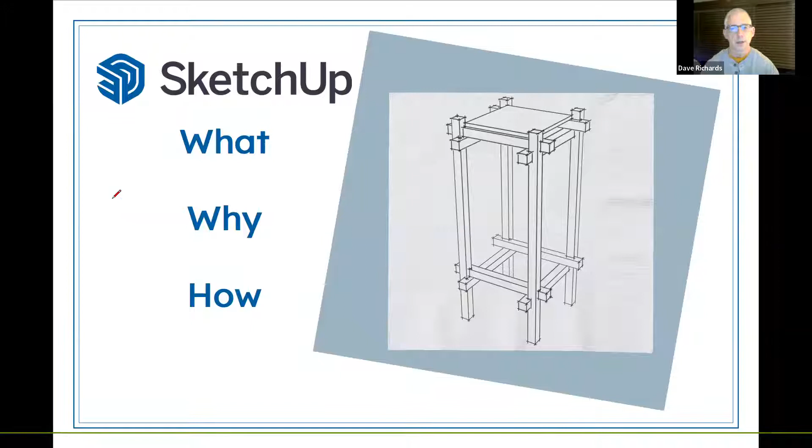SketchUp, I really want to quickly just cover a few little things about it. SketchUp was originally the idea of an architect who wanted a digital version of sketching on a napkin. He didn't want to get deep into something like AutoCAD. What it's turned out to be, though, is really a neat tool for anyone who wants to do visualization of projects, because you can create a three-dimensional project that anybody can look at and understand what it is you're thinking about.

There are a number of versions of SketchUp. The current Pro version is 2022. I'm not going to read all of this stuff.

Free versions for hobby use are SketchUp 2017 Make, which, although it's getting a little long in the tooth, is still functional. There's SketchUp Free, a web-based version that's free for hobby use, and SketchUp Shop, which along with SketchUp Pro, are intended for commercial use, although hobbyists can certainly use those. The paid versions, Pro and Shop, are subscription model things like pretty much every software on the market today.

I've been using SketchUp for a long time, since 2003, hard to say that now. I've been an authorized trainer for SketchUp since 2006, and I've been working as a contract employee for Fine Woodworking Magazine since 2007, doing blog posts about using SketchUp, and I create plans for projects I feature in the magazine.

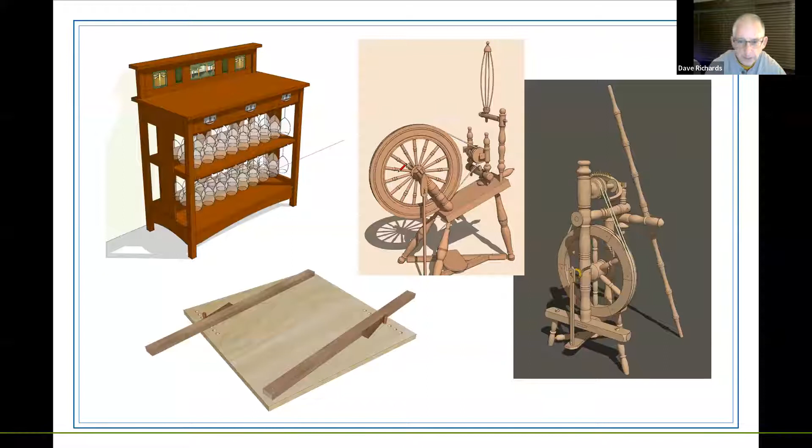We'll come back to that in a minute, and let's do this.

Dave, just as a question, what version of SketchUp would you recommend for a hobbyist that is just new at it? It depends. I would suggest, for a hobbyist, you might start with SketchUp 2017 Make. That's free for hobby use.

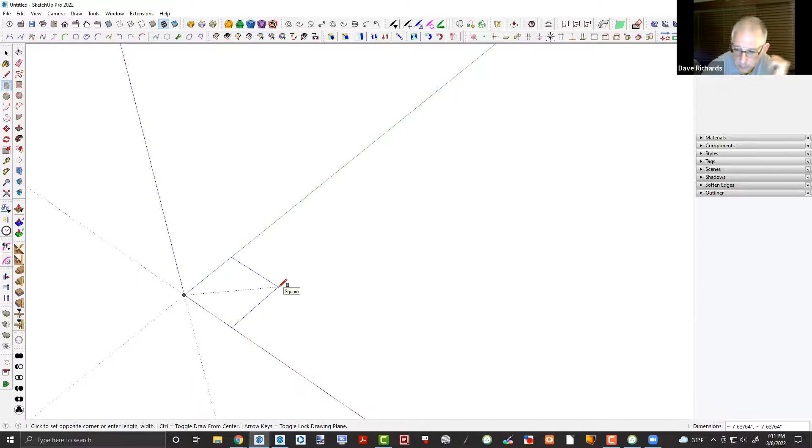So I'm going to start. I've got the rectangle tool and I'm just going to drag this out. And by the way, down in the lower right corner, hopefully you can see this on my screen, kind of above the time and the temperature, there's some dimensions shown. And if I drag this out, you can see the size of the rectangle that I'm getting. And if I just type, in this case, I'm going to type 0.75 and 16. So that's 3/4 of an inch by 16 inches.

And then I'm going to use the push-pull tool. By the way, I may fall into the thing of using keyboard shortcuts. They're really useful. I think of the space I'm working in as sort of my workshop. The toolbars are the tools that are sort of close to hand, or they're wherever in the tool tray on my bench. The keyboard shortcuts, I think of those as sort of the tools that I keep in the pockets of my apron. So they're really handy.

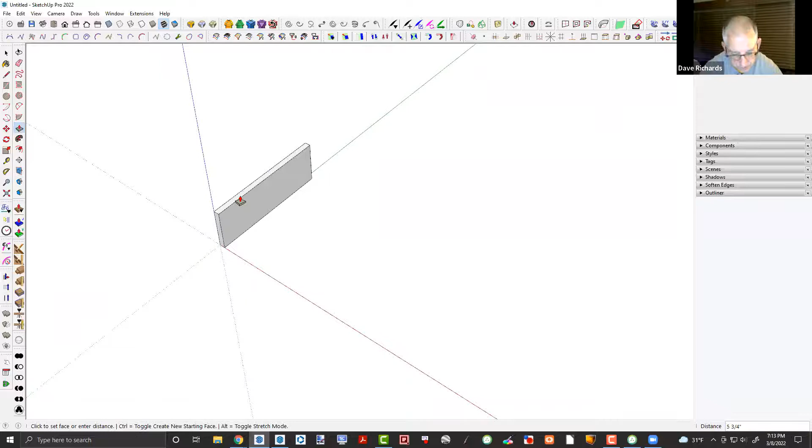And by the way, I'll do this a different way. I'm going to type 5 3/4. You can do that. That's how high I want to make that part. So now I've got a 3-dimensional thing. This is going to be the end of a case.

And if I drag a selection box around that, I'm going to hit the G key and I'm going to create a component that I can give a name to. So I'll just call this case side. And so now I've got a part.

And if I want to, let's say I'm going to need another end to this thing, I'm going to use the move tool and the copy function. And for those of you that are new to SketchUp, don't let the speed I'm working at here deter you, because I want to get through modeling this thing so I can answer some questions. So I'm maybe not going as slow as I might if I was really trying to just show the modeling of this particular piece. This is just a thing to get the point across.

So in this case, I'm going to move this side down 23 1/4, so 23.25. And let's make another copy of that. If I measure that, you can see it's 24 inches now. So I've got a 24-inch wide case.

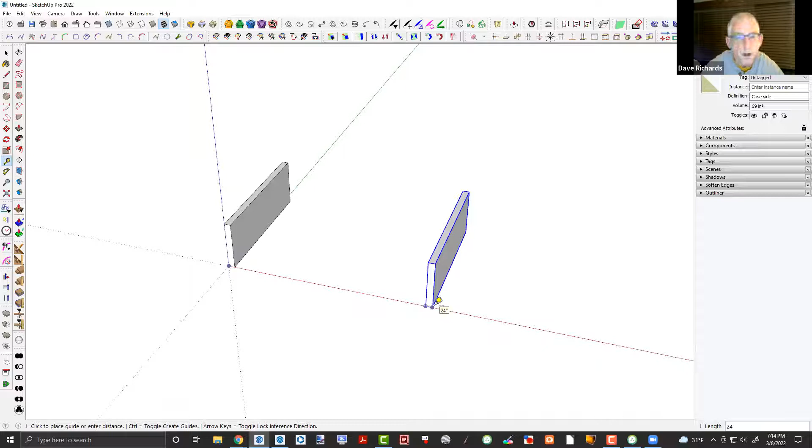And so if I get the rectangle tool again, let's say I draw a rectangle from this point. So what I'm doing, and this is one thing that I've found is really useful, is I'm modeling in place. So once I've got my end pieces, I have the footprint of my case, so I don't need to know what the dimensions are for that. If I make that 3/4 of an inch, I can type either 0.75 or 3/4.

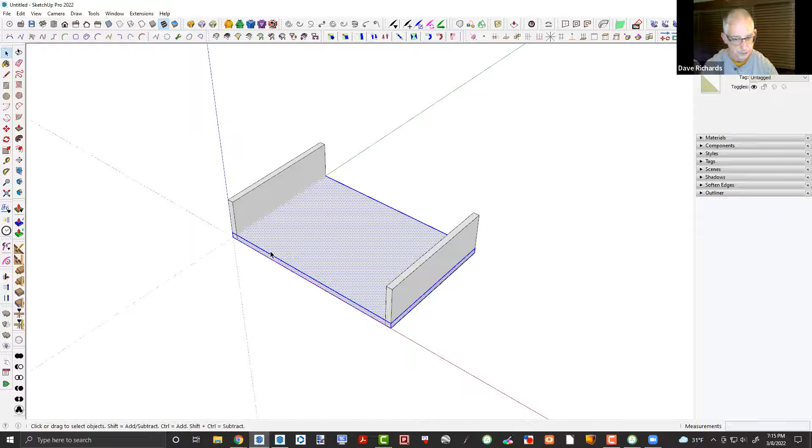And the units are understood. And this time I triple clicked on that geometry, which selected all of it. And this time I hit G again to create a component, and called it top/bottom.

And if I now select the move tool, M is the keyboard shortcut. That's the default. If I put that up there, I now have a case with all my parts. To keep things simple here, I'm going to do a thing real quick - I'll just flip that, which makes it a mirror image of the one on the left.

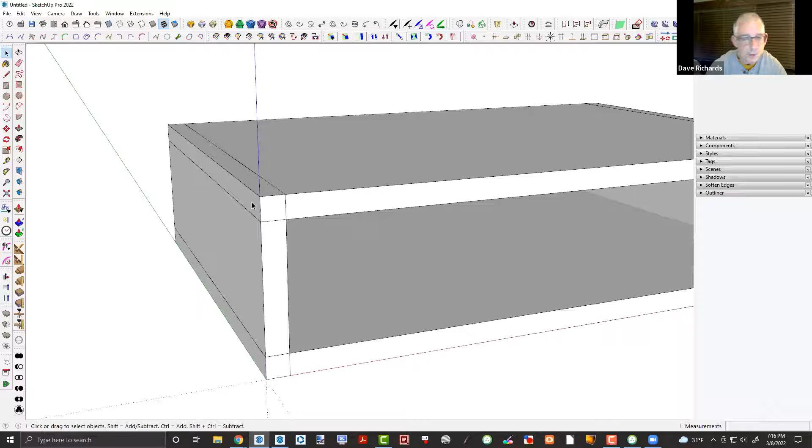But I'll do this a couple different ways. I can open one of these for editing and make changes. But before I do that, let me talk about this - see how I've got my parts overlapping? That's a cool thing in SketchUp because you can lay out parts that are full size. You couldn't do that in the shop very easily, maybe with a really big hammer.

But I can draw a diagonal across between those corners. And then there's the tool called push-pull. I can push that back, and I've just mitered the end of that piece.

Another way to do that would be to use the move tool. So if I select that edge and come down to that corner there, and repeat the process. The neat thing here is, so if you could work in your shop with...

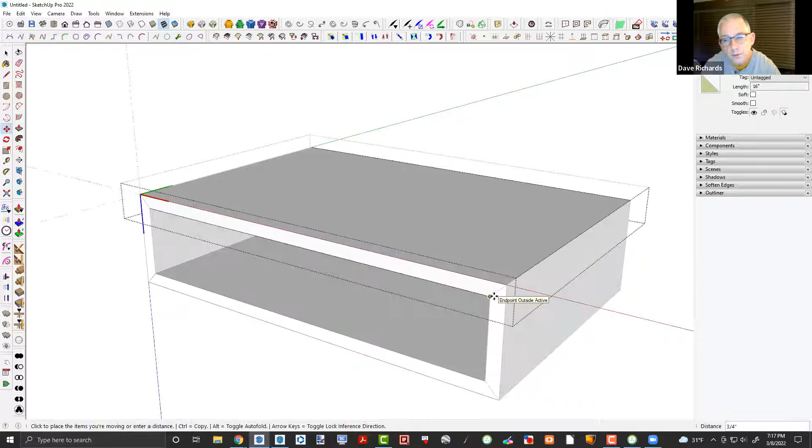and just take all your measurements off of what you've already measured, of what you've already built, you'd have a whole lot easier time and you wouldn't have to work with any numbers. You see, I've just now mitered all 4 corners of my box without knowing anything about dimensions or without entering any dimensions.

If I want to put, let's say I'm going to put a drawer front that's an overlay on here - I'm kind of working on a mid-century modern piece, but I've just drawn a rectangle. I don't even care what the size is for this thing. It just has to fit. So once I've started my model, everything just has to fit. That's kind of the key here.

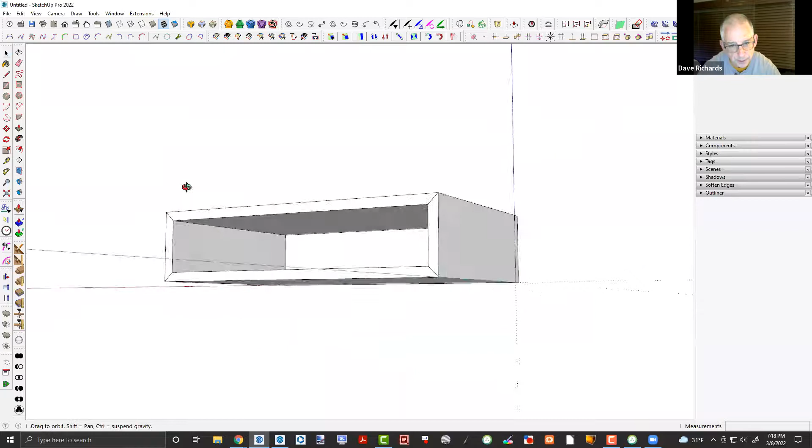So if I make that a component - again, select it all, G, we'll call it a drawer front - and I've got a drawer. I'm not going to go through the whole process of modeling the drawer here because it's more of the same sort of thing. But let me show you something else that's kind of neat.

If I've got a component that I've created - actually I've got a bunch of components that I've created. Components are something you can save in SketchUp to use later. What I'm going to do is use the move tool and move this up.

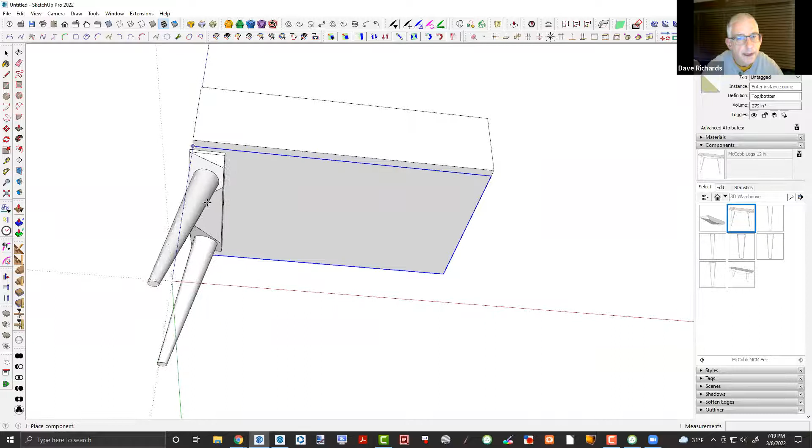Let's go straight up - I keep hitting my mouse. 12 3/8. Because I can take this and let's put it there for the moment. It's going to the wrong place. There we go. I move that in now, let's say 3 inches.

I've got a leg - I've already done this leg component, leg and cleat thing. In this case, I'm going to rotate that around 180 degrees. And we'll move that in about 2 inches, we'll call that good. That's a little bit farther than it needs to be, but...

one of the things that's really cool about this is that you can have components that you've already created and you can save them to use for later projects. So you don't have to model things multiple times.

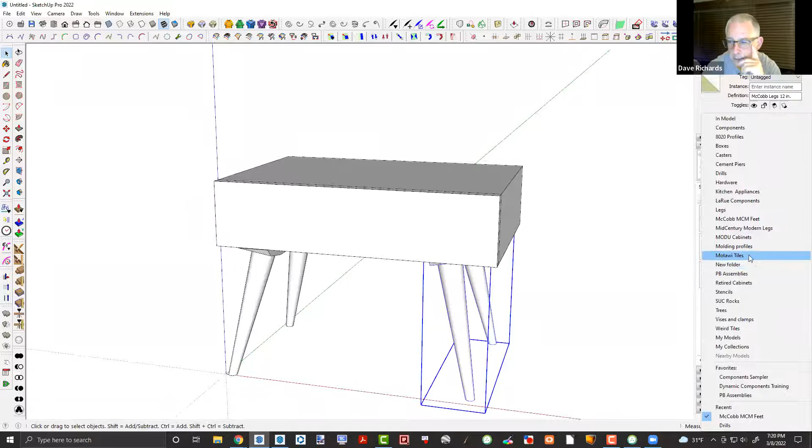If I go in here to say my knobs and pulls - this is probably not really appropriate for this particular piece of furniture, but - put a drawer pull on it. That's something I modeled probably 10 years ago, and I still have that component. I can use it for projects now.

And so, Dave, does the free version allow you to save components? Yes, you can create components and then save them out to what's called a local collection, and use them later. I would highly recommend that.

You know, for me, like when I go out to buy screws, if I need 10 screws for a project, invariably you end up having to buy something stupid like 13 of them, right? It's never the right number of screws when you buy a package. But when I do that, I'll buy a box of 50 or 100, and throw them into my collection of hardware in my shop. So I've got lots of different hardware I can choose from, which means now my wife will let me go to Menards, or Rockler, and buy hardware.

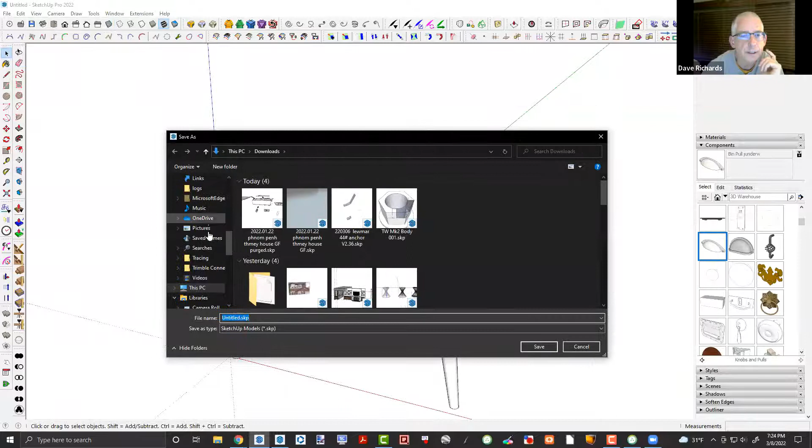So let me do this. I'm going to save this file. I'll save as, and it doesn't need to go there. We'll put it on the desktop. I'm just going to call it mid-century thing, I don't know what it is.

I have to save it before I can do the next step. One of the nice things about SketchUp is that with the desktop versions, there are a whole lot of extensions available, and here's a whole long list.

I don't want to go into all of these tonight, but scroll way down to the bottom. Why it shows up down there, I don't know, but there it is. There are a number of cut list extensions, and I'm going to add something to get my drawer pull to show up in the parts section.

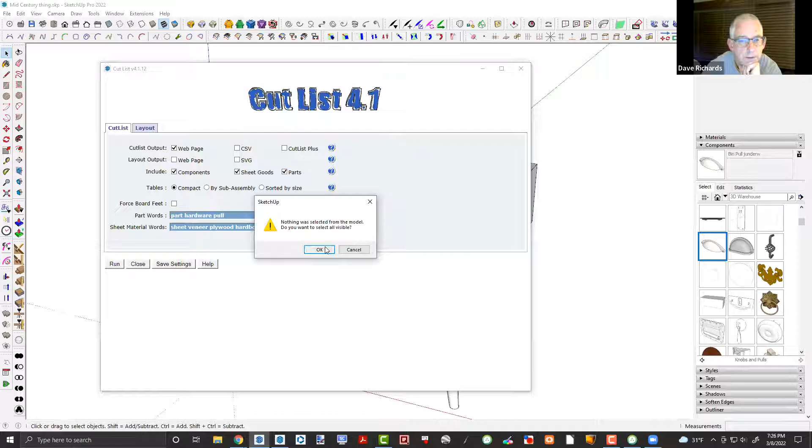And I'm going to click run. Nothing was selected—do I want to select it all? Use it all? Yes. And so here's just that quick. I've got a cut list that gives me the dimensions of all the parts.

And if I scroll down here all the way, you can see my pull shows up in the other parts section. So I don't know how many board feet of drawer pulls I need, but who buys drawer pulls by the board foot anyway. So all of my parts are listed with the quantities and the dimensions.

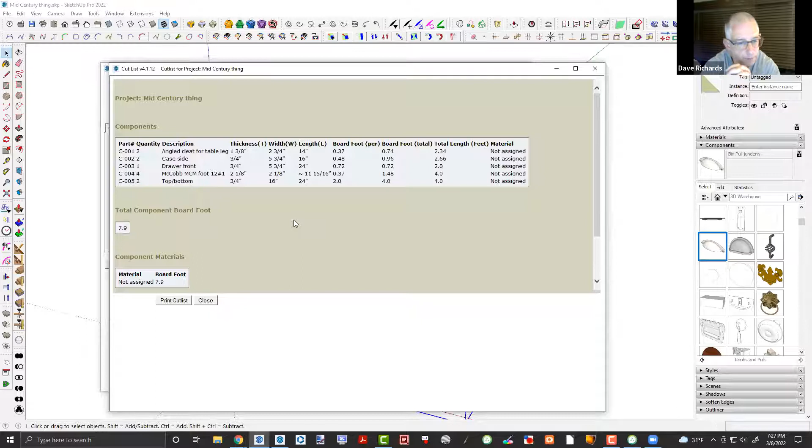The foot or the leg is kind of an odd length because of the diagonal, but this can be a really handy thing when you need to go out and shop for lumber. And it happened that quickly—it'll happen that quickly on a much more complex model.

Anyway, this is a free extension, available from the extension warehouse. You can download it and install it into even SketchUp 2017 make. It'll give you way more information than you actually probably need, but if we had something that was supposed to be sheet materials, it would sort that into a sheet materials section.

Very quick. One of the things that I like about working in SketchUp, the way I've done it—where I laid out a couple of parts and then modeled everything else to fit—is that I don't need to know the information to get it into SketchUp. I want SketchUp to tell me. If I had to know every single dimension to model this thing, I might as well just do it on paper and write out my cut list manually.

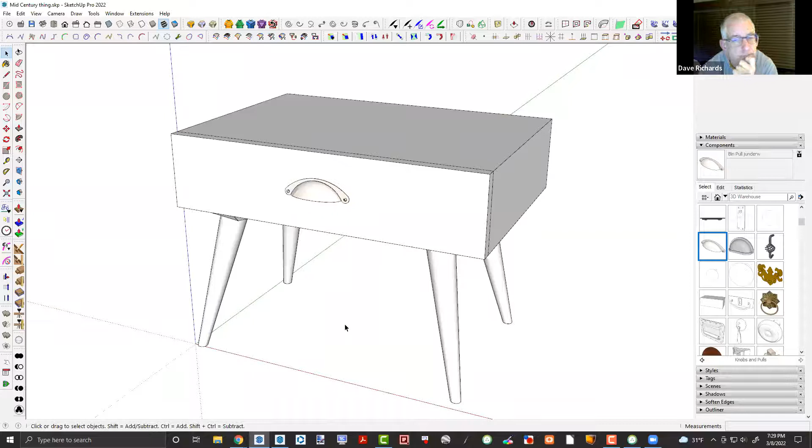Does anybody have any questions at the moment? Want to ask me anything? Would they like to see me do something in particular? Any of that kind of thing?

We have one question about a member making a shadow box that has a fabric ribbon in it. Is there a way that a fabric ribbon or a piece of fabric can be drawn in SketchUp?

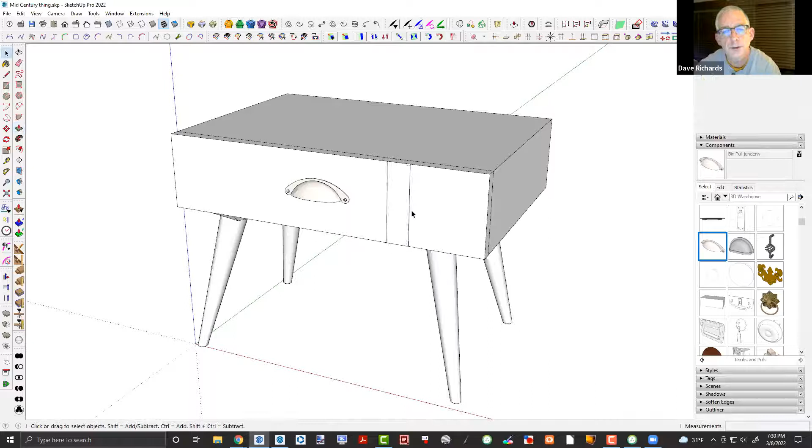Yeah, you can do something like, if it's just a straight thing, maybe that sort of a thing. If I make that really thin, but very slightly three-dimensional, I can add a material to that. You can add custom materials. I don't have a ribbon material right now, but if I go to my textiles options, I could add some sort of texture. That's kind of the wrong size, but I could make that something like 2. So I'm going to add a texture, if that sort of thing answers the question.

There's an extension, gets a little involved getting into it, called Clothworks. It's not available for free, but it'll actually drape fabric over something, if that's what he's after.

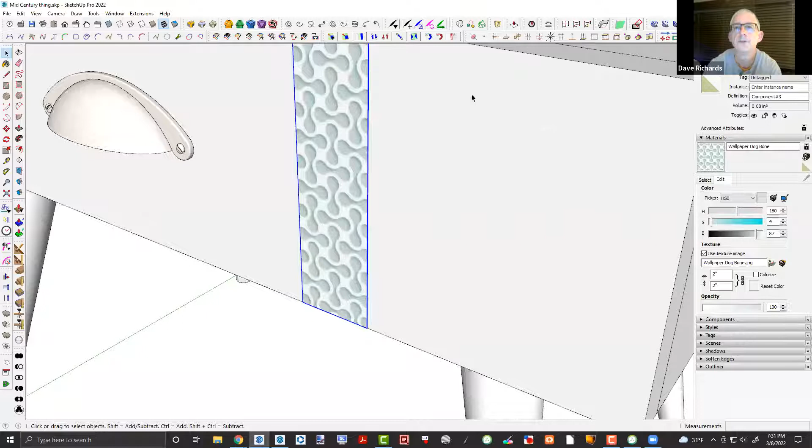Or there are other extensions that can help. If I make that a component—I didn't give it a name, I kind of cheated there—I'm using an extension called Fredo Scale that will create a curved piece, if that's what they're after. So there are tools out there that can do that kind of thing.

I don't know exactly how the ribbon would be used.

Is there a way you could convert a SketchUp file into something a CNC machine would read? Yes, you can export DXF files, for example, that can be used for CNC stuff, but you need either SketchUp Pro or SketchUp Shop to export vector files—DXF is a vector type. SketchUp Make or SketchUp Free, the web version, don't offer that. There's also an extension called Faber that's set up specifically for getting CNC stuff out of SketchUp. Also, Vectric makes several different software options that will import a SketchUp file and generate files for CNC routing.

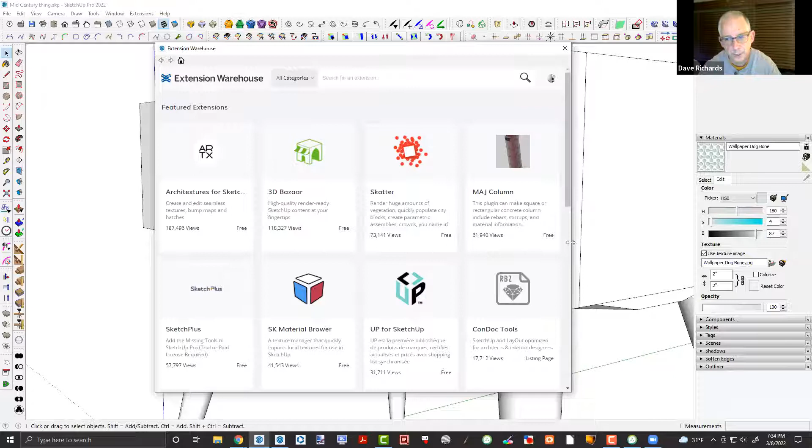Do these extensions, are they available like in a warehouse, or where? Yes. There's what's called the Extension Warehouse, which in 2021 they moved into the Extensions menu. Prior to that, it was in the Window menu. You can go to the Extension Warehouse and search for various extensions. Many of them are available for free. There are some that are commercially available.

Another option is a website called Sketchucation. It's a web forum that's actually older than the Extension Warehouse, and they have more extensions. There's not a whole lot of crossover between the two—a little, but not much. So Sketchucation is another source, another common source.

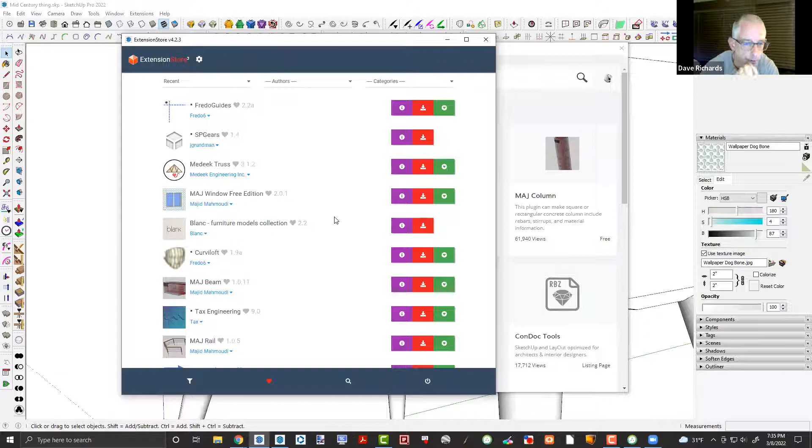What I've got open here is the Sketchucation extension store, which allows you to install extensions just by clicking the red button. If you look at the Extension Warehouse and select one—I don't know, let's take that one, I don't even know what that one is—there's an install button and you can install that. I don't read French, so I don't even know what that one's for.

Once you've installed extensions through either the Extension Warehouse or the Extension Store, when there are updates, you can find out about those and update them. Lots and lots of extensions available here. This is just some recent ones, but you can search if there's something you're interested in doing.

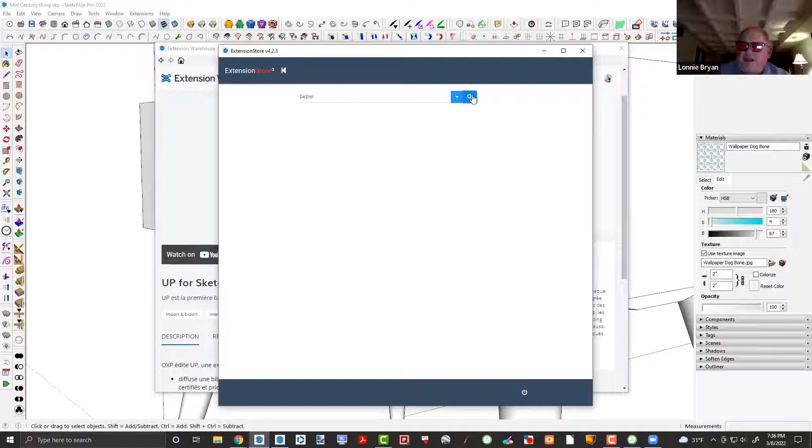I've got a question here that I apologize, I don't understand. The question is, are all the drawings isometric? No.

So I'm working with the camera set, SketchUp's camera set to perspective. You can choose to use parallel projection and then an isometric view. Personally, I find that really jarring to look at. Most people don't get it when things look this way, because this isn't the way we see things in the real world.

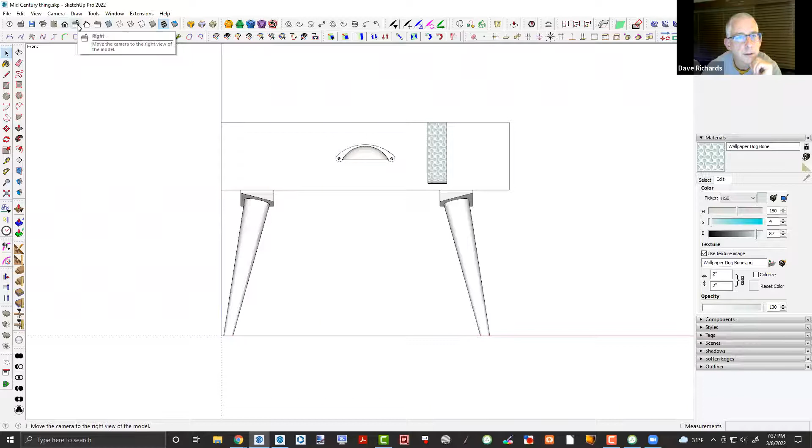But you can also choose two-dimensional views if you want. So this is just a straight-on front view if you want a 2D view, or if I want to look at this from the side. And you can see I didn't get one of my legs positioned correctly, so let's fix that. We'll go back here. So you can choose to show your three-dimensional model in 2D if that's what you want.

Let's do this. Let's open a different file that's got a little more going on. In fact, what I'm going to do is go to one that I did for Fine Woodworking. Let's see. We'll use, let's see what that one does. I'm not going to save the changes to that. Yep, there we go. All right.

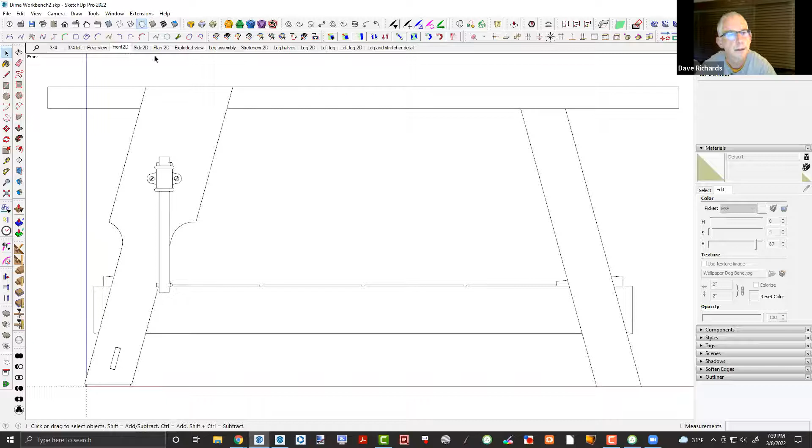So this is a bench that I did for Fine Woodworking for their tools and shops issue, and I created plans for it. So here's a perspective view, but I've also got a 2D, and I've created what are called scenes. So they're sort of fixed camera positions. I've got a front view, a side view, and a plan view, looking straight down on the top.

By the way, here's a component that I made years ago for a different project, and conveniently I saved that as a component and could use it here, so I didn't have to remodel all those screw threads and that whole vice screw to make that work.

So is it possible for you to like explode this view and lay it out on the board? You can do that. You can pull the parts away from each other and lay them out, like you might want to cut them out of view. What I do when I create an exploded view is I've got a copy of the model.

My assembled copy that we were just looking at is over here by the origin, where the red, green, and blue axes come together. But I've got this other copy here, and of course I don't have the top displayed here. So I've created another scene with a separate copy to create an exploded view to use in the plans.

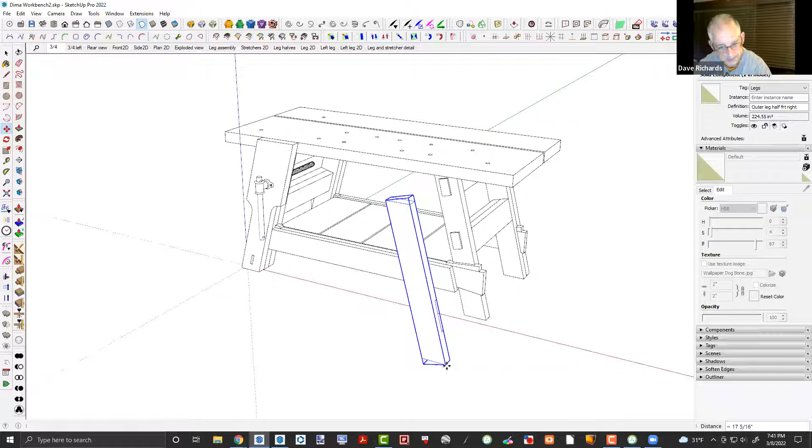You can do this, and this I just did by selecting components and moving them away from each other. One of the nice things when you create the components is they aren't attached to each other. So if I want to pull that leg out away from the rest of the model, I can do that because it's not stuck to it. So it's pretty easy to pull those things apart.

If you wanted to do a layout sort of thing, let's go back to here. I'm not going to do all of this, but let's just do some of it in that cut list extension. Scroll back down to the bottom of this list. Here we go. It does have an option to do a layout sort of thing. This may not be exactly the way we would really want to run it, but it'll show the parts laid out on boards.

Now, my personal feeling is that for stuff made out of solid wood, this is not a particularly useful thing, because you need to cut out for grain and around flaws in the wood and that sort of thing. But for sheet materials, it's really pretty nice. So you don't really have to do the layout manually, but you could if you wanted to.

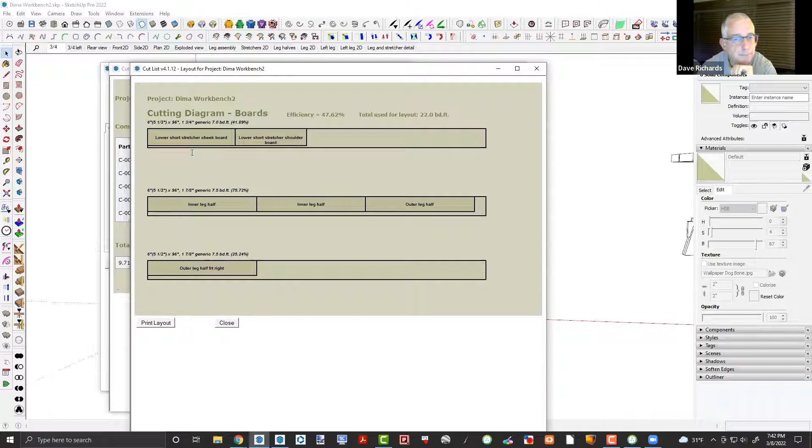Dave, it does give you a good idea about how many boards you ought to be looking for. Right, right, there is that. Of course, this is sorting them sort of by thickness. So these first two pieces are out of a 1 3/4 inch thick board, and the next one is out of 1 7/8, so they're kind of thick pieces. But yeah, you're right, you get an idea of how many boards you might need.

So, of course, you might lop this thing off and then plane this unused section down, or you might start with the 1 7/8, lop this section off and plane the rest of it to 1 3/4 and get some more parts out of it—that kind of thing.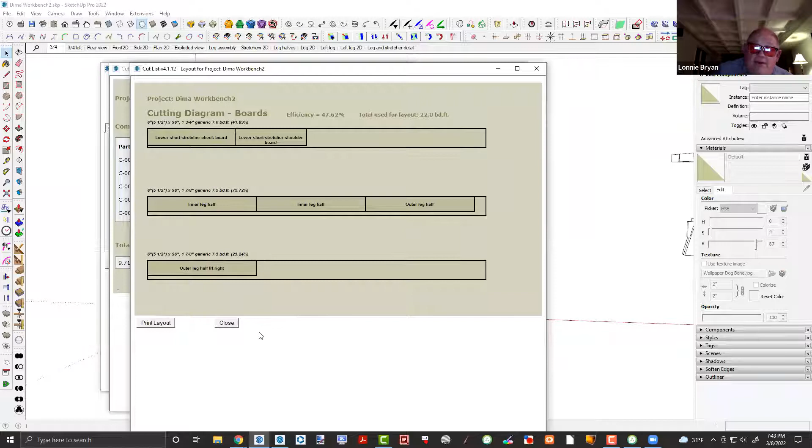Once you make a component, can you call it back up and modify it? Yes, you can open the component for editing. You can either right click on it and choose edit component, or—what I normally do—just double click on it and open it for editing.

One of the neat things about this—let me just do it to this thing here. Let's say we want to put a hole in this. So I've got the circle tool and I'm just going to drag out a circle of some radius. So I've just put a hole in that thing.

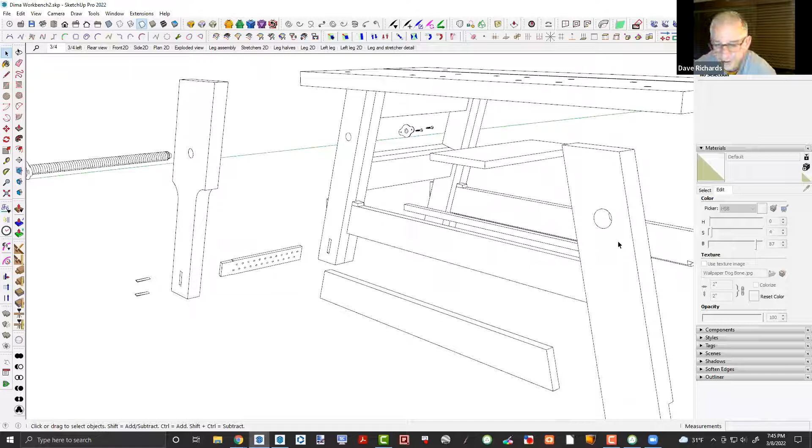If we go over here to the copy, whatever I did to the one component gets done to any other instance of the component in the model, which can make you kind of soft—because in the shop, if you've got 4 or 5 parts, like drawer sides, and you cut the dovetails in one of them, in SketchUp the other copies get the same dovetail joint. But in the shop you still have to handle all four of them. So you don't have to do that same thing over and over with the component.

The other thing is for something like this—do I want to do this here? Yep, no I don't. I'm going to undo that because I don't want to get into my mortise. There's a mortise on the other side of this thing, but undo is our friend here.

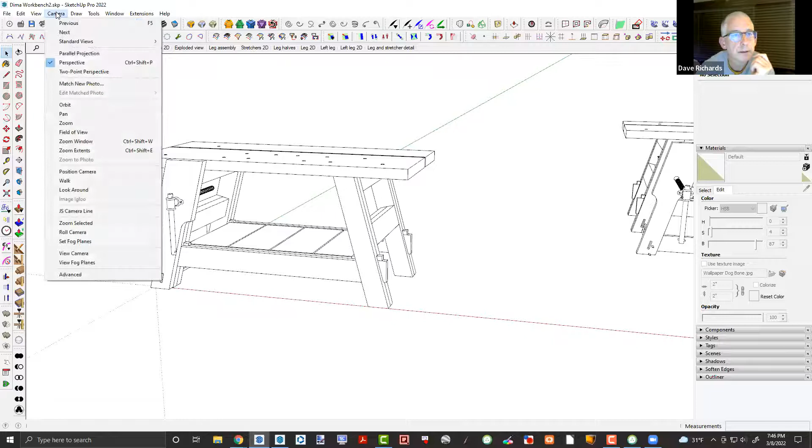But yes, you can make modifications to a component once you've created it. That's also really nice in that if your project changes—let's look at that thing here.

So maybe the client says they want the bench to be another foot longer. We can modify it very quickly. Oops, I came off the axis there—so you can modify it the wrong way, of course.

But you can also—I won't do the entire model this way—but you can see my components over here are getting longer. Maybe I'll make another shelf board. I just made a copy with the move tool.

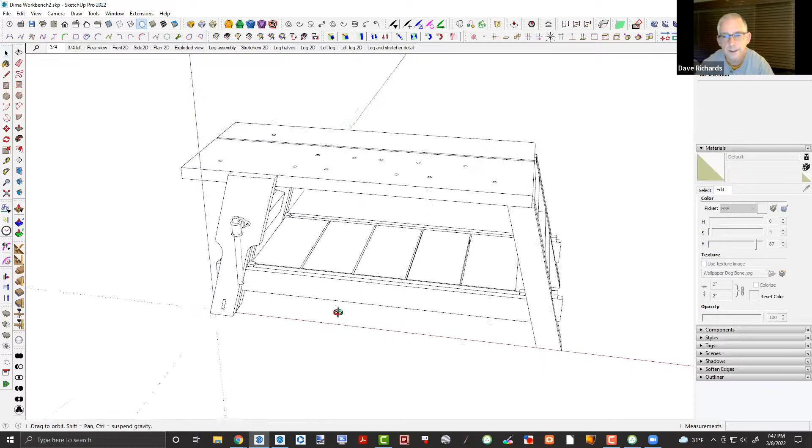Actually, maybe I'll end up doing this after all. That one, I'm just going to use push-pull. So now I've just made the bench another foot longer than it had been.

So it's really nice, especially if you've got to get somebody else's approval and they say, can you make it bigger, can you make it smaller—whatever. It's kind of nice to do that before you're committed to making sawdust.

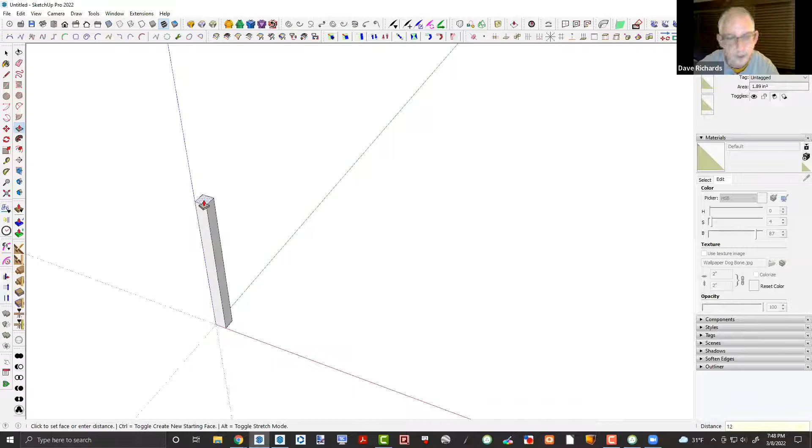One of our members has asked if you can show us how to make a mortise and tenon in SketchUp. Sure, let's do this. I'm going to start with a new thing—let's do, I don't know, 1.375. We'll make a small leg, and I'm going to make it kind of short here—just 12 inches tall.

So I'm going to make that a leg. I'm going to show you two different ways to do this. Then let's put an apron on there, and we'll make that 4 by 3/4. I'll just pull it out a little ways and not do the other end of it.

To make it so you can see what I'm doing, I'm going to go ahead and make that a component—we'll call it apron. And then I'm going to switch to X-ray mode so we can see through the leg. I'm going to create a tenon, basically a third of the thickness—1/4 inch, that'd be common.

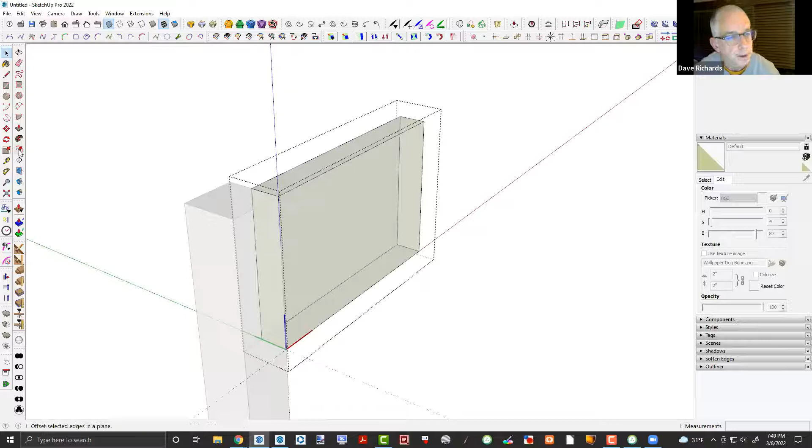So I'm going to use the offset tool. I'm going to come in here—let's come in 1/4 inch. And I'm going to pull that out, let's say 1 inch. So I've got a 1 inch long tenon.

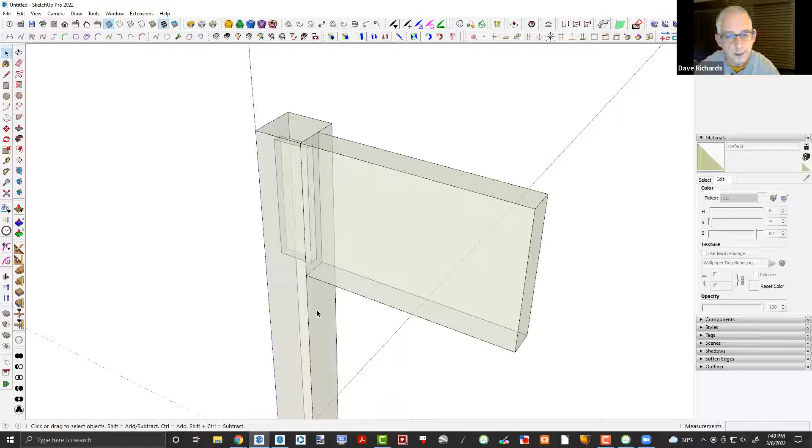So that's done. Now the neat thing here is I've put the tenon in the leg and there's no mortise yet. So I could lay out the mortise just like I would in the shop with lines and then draw it. But what I can do here is open the leg for editing.

I've got the rectangle tool, and what I'm doing is tracing the base of the tenon. It's maybe a little there, you can kind of see that. And now if I use push pull on that face, P again for the push pull tool.

Now, of course, that's not allowing for any extra depth—usually you cut the mortise a little deeper than the length of the tenon, but that's a perfect fit and perfectly laid out for where the apron is, because I use the tenon as the guide for doing that.

So if I switch out of X-ray, I'm just going to move a copy of this out, and you can see there's my mortise. I'm going to undo that, pull a copy out. I just did a bunch of Control Z's, need to do another one. All right, so now I shouldn't have a mortise.

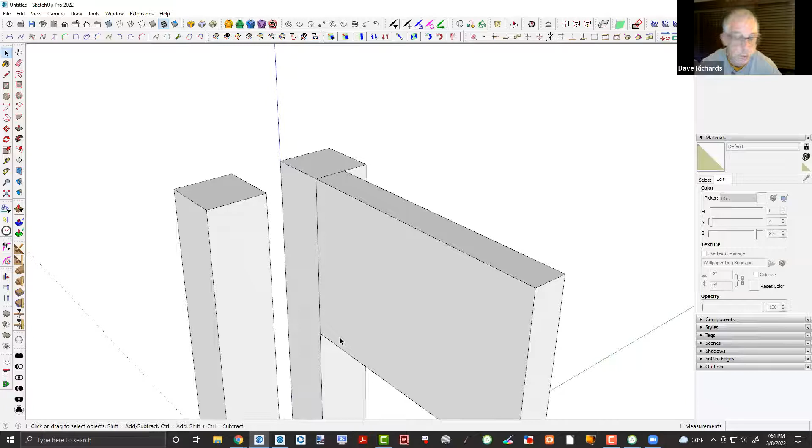I'm going to use a keyboard shortcut for this, but there are a couple different tools available. One is called Bool Tools 2, which works in SketchUp Make, and it'll use one component to trim another. I've got a keyboard shortcut for that, and I'll use this to trim that. And I've got a mortise.

Bool Tools 2 is not a free extension, but for the time it can save you, I think it's pretty well worth it. So if I pull this back, you can see I've got the mortise in the original leg as well. Anymore, I don't draw mortises—I draw tenons and make the tenons cut the mortises.

Can you dimension this or show us how to dimension a drawing? Yeah. So in the tools, dimensions. And we can put in—let's go here, and we'll come here and come up there—and we can put in whatever dimensions we think we need.

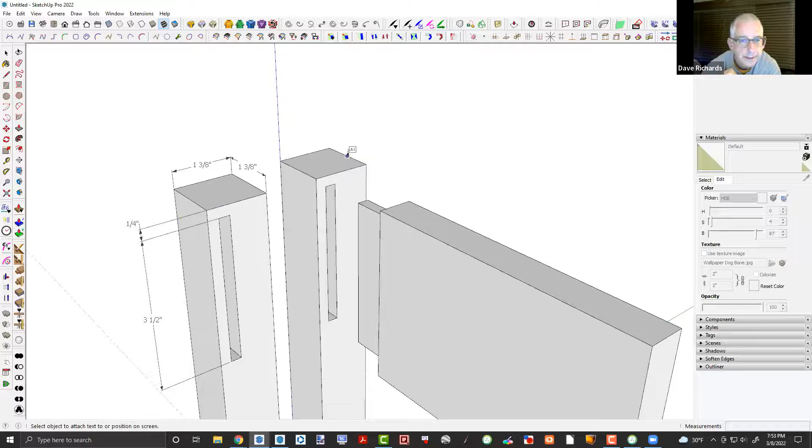That one, I don't like where that is, so I'm going to do text position, outside end—I just right clicked on that to get that. And we can come down here and do all that kind of dimensioning we want. You can add labels too—if I go to text, I don't even have to type anything because it's taking the component's name. So I can do that sort of thing if I want.

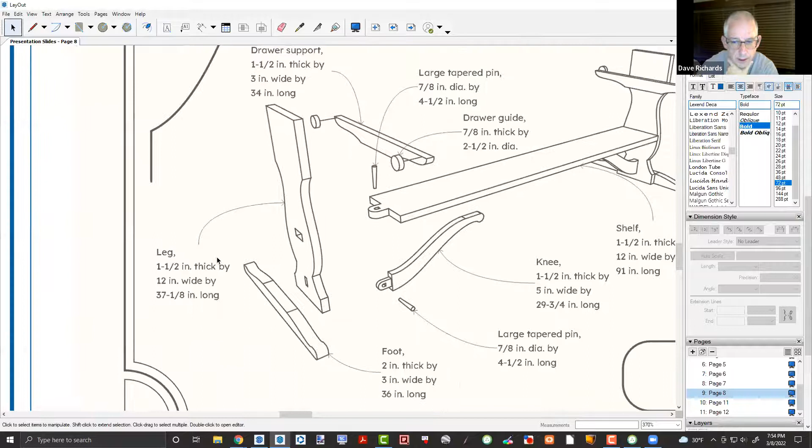Lots of capability as far as that's concerned. A lot more of that capability when you get into Pro and then using layout, because you can do things like—let's go back to here, and I'll zoom in on this. So all of this text, and this is kind of not so good because this is an image made from my plan, so it doesn't look real sharp, but all of this text was put in automatically in layout by putting a label on, so I don't have to type all that stuff.

And there are dimensions, like these, that go in. And all of this stuff here comes from running that cut list extension. So you can get all that information back out of SketchUp if you want.

So Dave, there's—you kind of know my story. I'm just a neophyte kind of with SketchUp. Would you, how do I put it—what are the 3 most used tools?

I would say the 3 most used tools are probably the rectangle tool, push pull—so the rectangle tool gets you a shape that you can then use push pull to make 3-dimensional—and the move tool, because the move tool is used to move things around, to make copies, to sort of build your model. But pretty much I haven't done anything except for that hole that I drew. I haven't done anything as far as modeling other than just using those 3 tools.

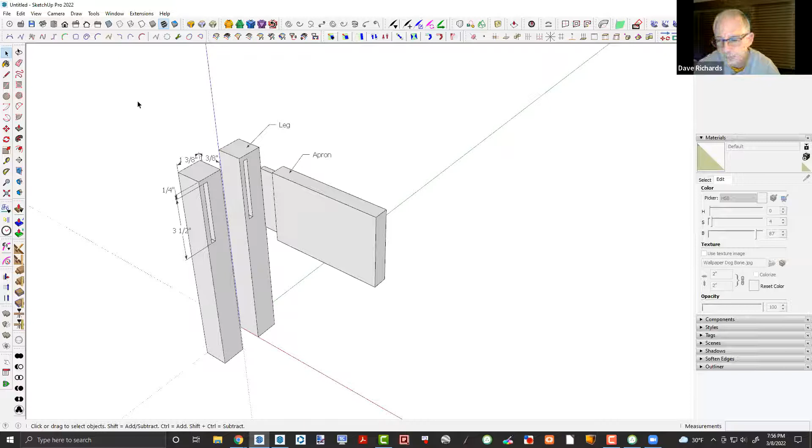You can build a ton of things with just that, and that's the thing—like with woodworking, there are those of us who buy every shiny tool that comes out, all those one-time tools we get emails about. And that's fine. But a lot of us work with not much and manage to make amazing stuff in our shops. I'm thinking about my brother, whose woodworking shop is very rudimentary—compared to my shop, he doesn't have hardly any tools at all, but he puts my woodworking to shame. He does much better woodworking than I do. And of course, he's a machinist by training, and he works that way in his shop, which makes me nuts.

But so I think there's a few other tools. For example, in fact, let me just do a quick thing here.

So I'm not worrying about dimensions this time. I'm just kind of drawing something, and it doesn't have to be pretty.

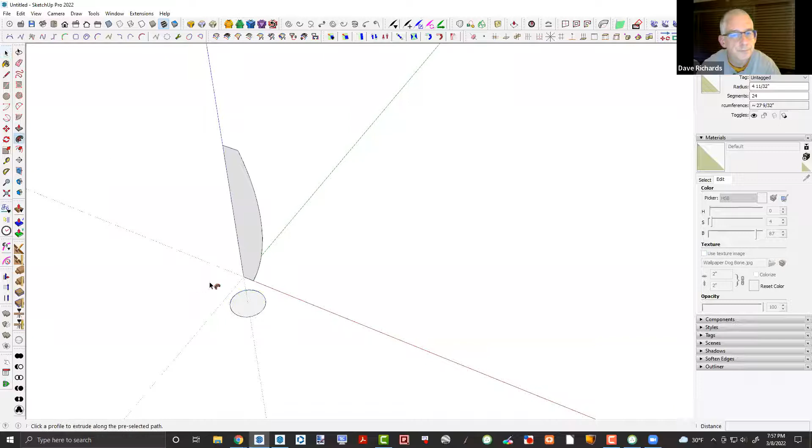But another tool that's really useful, especially if you're into the round stuff, is the follow me tool. Because you can make round stuff. You can make it a whole lot more complex than that obviously, but let me back up here a little bit.

Say we want to make a leg, and obviously the dimensions are a little weird here, but say you want to make a leg and you just want the inside or the outside two faces to be concave. So I just used the follow me tool.

A few years ago, I had a fellow contact me about 4 o'clock in the afternoon on a Saturday saying he was trying to model a leg very much like what I've just done here. He was having a hard time, and could I show him how to do it? So I set up a web sharing session, and I did exactly the same thing I'm doing here. I selected those two edges, got the follow me tool, clicked on this, and it was done. And he said, can you show me that again slower?

And there isn't any slower. That's as slow as it goes. And then he said, I hate you. He said, I've been trying to do this since 6 o'clock this morning, and I'm still in my pajamas. And in a few seconds, there it was. I wished I could have had a justification for more tools, but anyway.

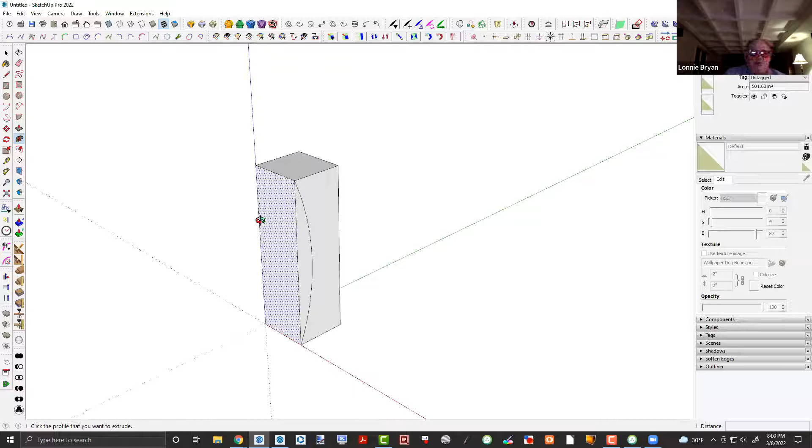Do you find it easier to operate SketchUp with a mouse, a sketch pad, or a mouse with a wheel? I've got a very simple, basic mouse with a mouse button and wheel. So there's the zoom, and if I press the mouse wheel down with it on something, you can see that. The program was designed for a mouse like that. I've tried using a touchpad and it drives me nuts, I find it really clumsy. There are some people who like to do SketchUp with a stylus, like a Wacom tablet type thing. That also makes me crazy. But it doesn't have to be an expensive mouse, as long as it's got a center mouse wheel and button.

Pressing the button gets you orbit, and scrolling gets you zoom. And if you hold the shift key with the center mouse button, then you get pan, so you can move it left to right.

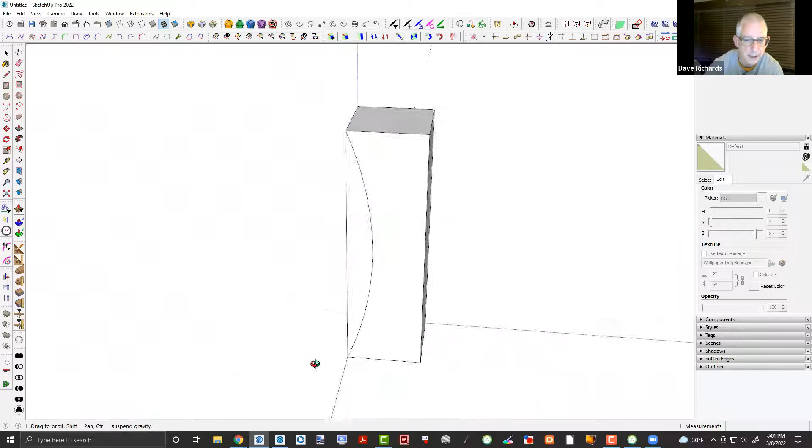One thing about SketchUp, we're representing a 3-dimensional space here. So it's really like you're looking at your project in the shop rather than a painting or a pencil drawing of it. So you want to look at it that way. You need to be able to look at your model from all directions, and getting used to this navigation is really good.

You'll know you've got SketchUp when somebody sends you a photograph, or you're looking at a picture on a website, and you push that center mouse wheel and try to orbit and it doesn't go. Everybody laughs at me when I say that, and they come back later and tell me they tried to orbit when they were looking at a photograph. And so I know then they have SketchUp ingrained.

How about photo rendering in SketchUp? SketchUp itself doesn't do photo rendering. There are a variety of rendering applications, and some of them have extensions that can be run, so they kind of look like they're running in SketchUp. They'll open a separate window. There's lots and lots of rendering applications out there.

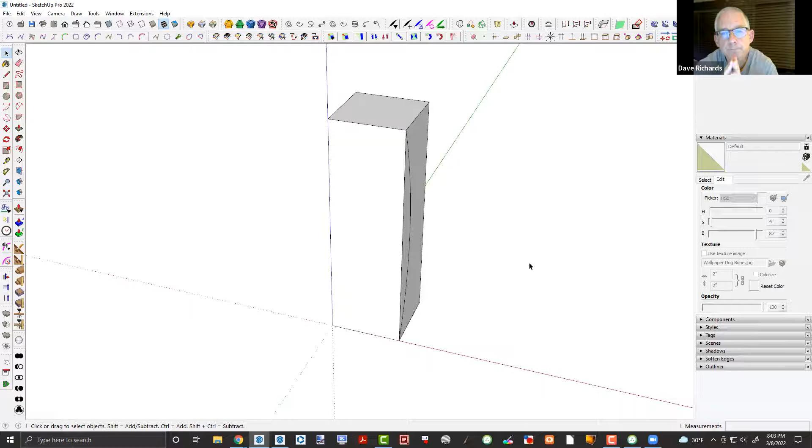I use an old freeware version called Kerkythea that works well for me. I'm in no way, shape, or form qualified to teach somebody else how to use it, but I get what I want out of it. And I don't do an awful lot of that in the first place, but that one is an option. V-Ray is a real common one.

There's some others out there, many other rendering applications. So if you want to do that, it's certainly a possibility. I was going to open another file here. Let's go up here.

More questions? We have a question about how would you use, if at all, layers in SketchUp. So layers are a thing. Let's go back to the workbench I had open. With 2020, they changed layers and call them tags now. They never acted like layers like you'd have in AutoCAD or Photoshop. Layers are a visibility control thing.

For example, here I've got a tag or layer for the vise hardware. If I turn that off—actually it's the vise chop. If I go to the vise hardware, I can turn that off. So it's really just a thing for controlling the visibility.

The objects, the components in the model are given a tag or a layer. If I select the vise hardware here, you can see up in the upper right in the entity info, it shows the tag as Vise Hardware. So you can determine what's being shown. When I go to this exploded view, the top isn't being shown. I've turned the top off, but if I turn the tag back on, the top components show.

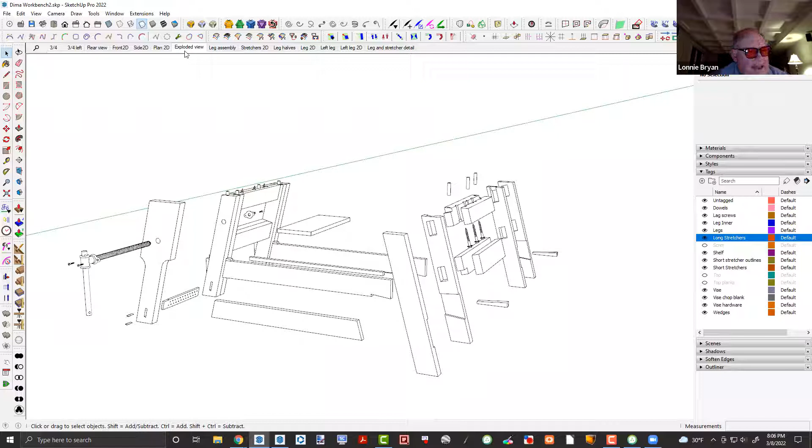How about on curves? Could you draw a cabriole leg? I could. It's really involved, and I don't know if anybody wants to stay here long enough for me to do that. A cabriole leg is really a challenge to do well.

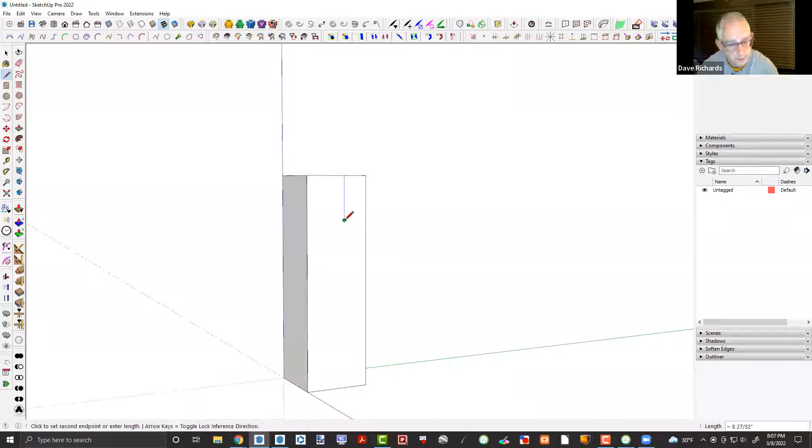You can certainly represent a cabriole leg. I'm not even going to worry about dimensions here, I'm just going to draw something. You could make it really simple. So I'm going to use an extension here to draw part of this that creates a Bezier curve.

I'm just eyeballing this thing. Close enough. All right, by the way, I used an extension called Bezier Spline for that. So I'm going to use Follow Me.

And there's the outside of it, but obviously it doesn't have the rounded edge. Getting that to be a smooth, rounded thing gets to be more of a challenge.

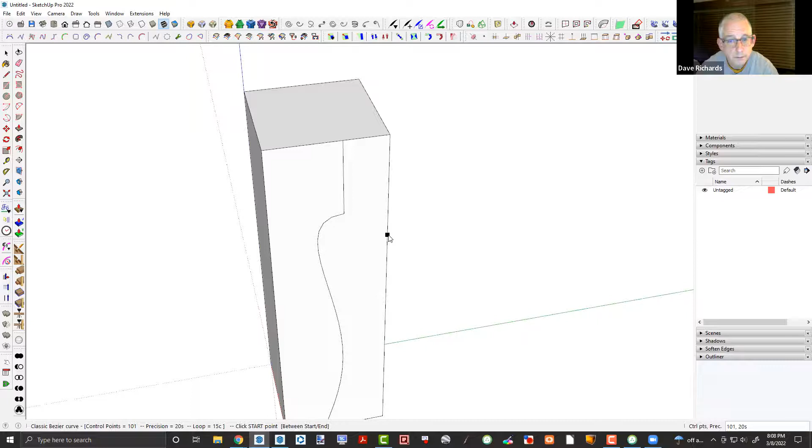If I were to do something like that, I might be thinking like that, and that's not exactly right—actually it's not right at all, but it kind of gives the idea.

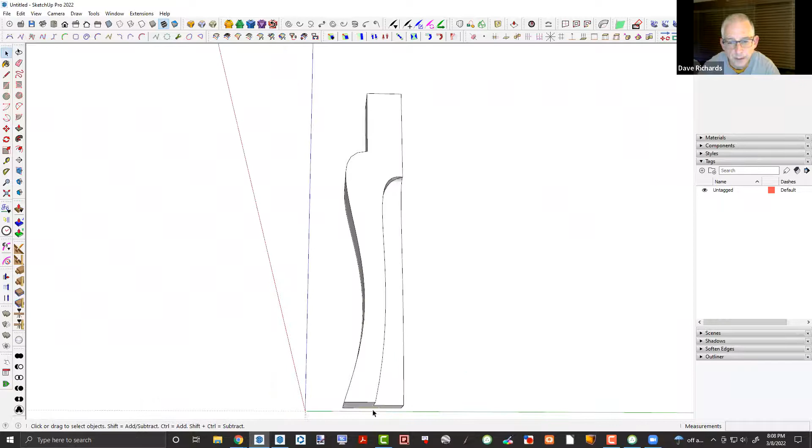But you can sort of fake that. I really need to do that inside differently than I did, but in terms of simplified, and not keeping everybody here till the sun comes up, maybe that kind of gets the idea across.

Thank you. You're welcome.

I've done serious cabriole legs, and I will admit they are kind of time consuming to model. You could probably just about carve one out in about the time it takes to make one in SketchUp. So it's the sort of thing you want to think about—how badly do you need a digital model of the thing.

What about adding wood grain or a wood tone like cherry? You can do that. There are some textures available—let me go back to that. This cabinet here—there are some wood grain materials that are available in the wood section. They aren't particularly realistic.

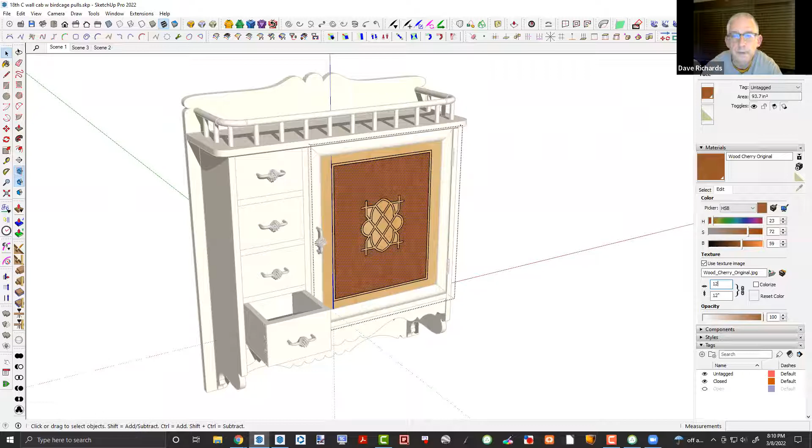There's a cherry material and it's huge. I don't know why it's 6 feet square, because it doesn't really belong, shouldn't really be. But for example, if I make that 12 inches square, that'd pass for wood grain.

The pine that I have here is a material that I took some images of full length boards, and I imported the images into SketchUp as materials to create my own wood grain textures. Let's undo that and get back to that. So I use a full length board—let's make it 8 feet long by 12 inches wide.

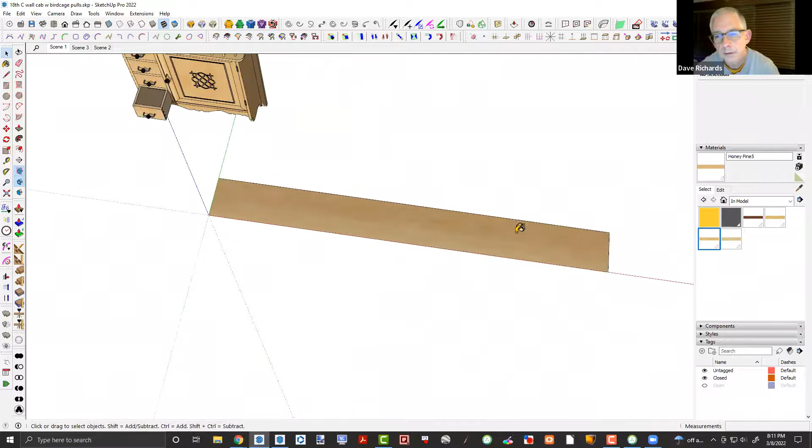I don't use real high resolution images because they can really bloat the file size. So if I get in really close, they're pretty fuzzy. But it makes it work in this case. I'm using a really large image and I can pick different parts out of that board, in air quotes, to use for different parts of my project.

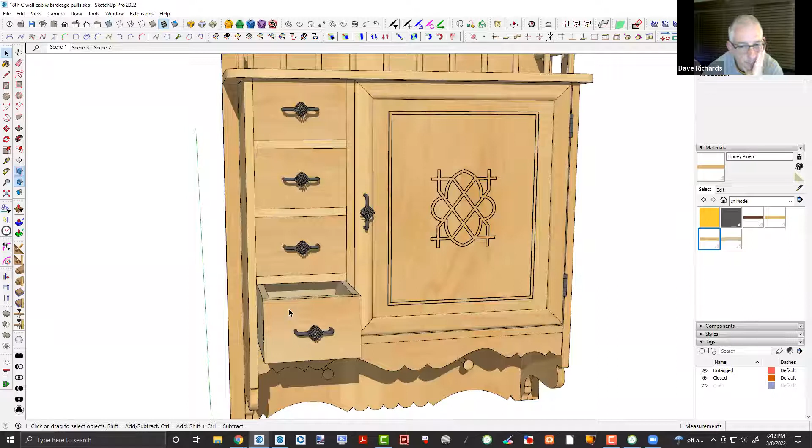So here I've got 4 drawer fronts. Technically they all have the same material on them, but I'm using different parts of it, just like you'd use different parts of a real board if you were going to cut those out. In fact, if I go in here all the way, you can see I can pick different parts of that board to use.

See, it's quite large compared to the project, so I can move that and pick a different section of the board to use. You can make very nice wood grain materials if you want, and it's really just a matter of importing the image as a texture and applying it to your faces.

And this is a lot like the hardware components that I've collected over the years. If I need a new wood species, I go hunting, or I take my own photographs of long boards and import those into SketchUp and create new materials. So over the years, I've collected quite a few different species of wood materials to use.

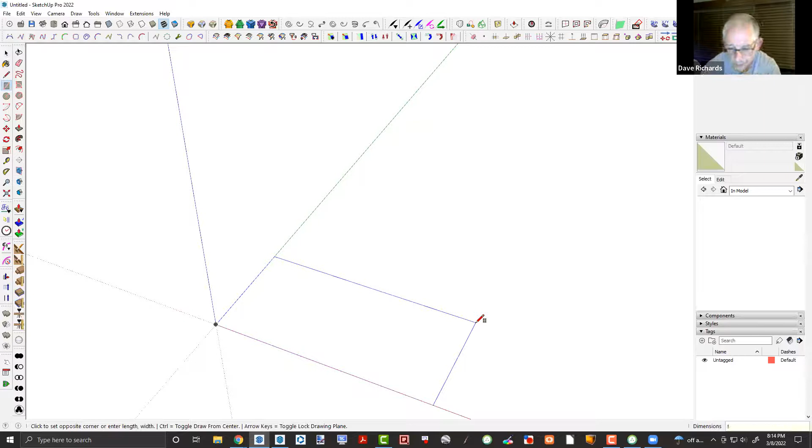Oh, so let's do something like, I don't know, I'm just going to make a square that's 12 inches, and we'll pull that up to 3/4 of an inch, and we're going to put an ogee curve on there. So maybe we would have, I don't know, we'll put it on the top.

Actually, I'm going to use the tape measure tool. The tape measure tool will put in guidelines and guide points. I think of these as sort of pencil lines or chalk lines. Let's go in a 1/2 inch there, and we'll come down here, I don't know, 1/16. And 0.5, we'll come down 1/2 an inch. So I'm going to start with a little line segment there.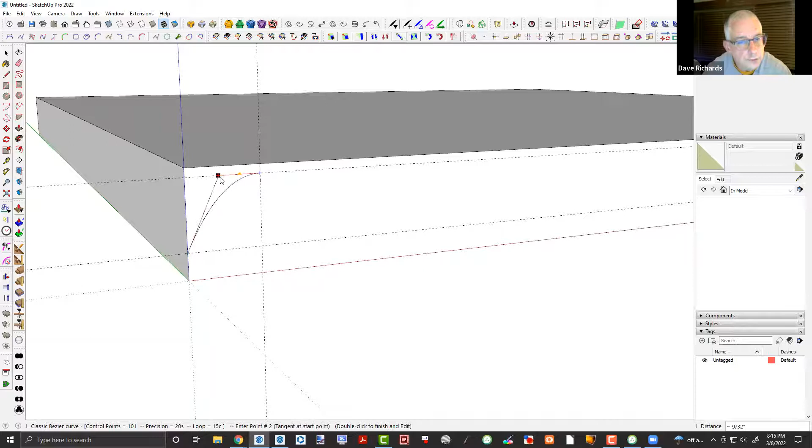And I'm going to use the classic Bezier curve from that Bezier Spline tool. You could do this with just... does that count as an ogee curve?

And now I'm going to put this around like it might be a tabletop, and maybe it's inverted, I don't know, but so I've selected the top of this panel, and I'm going to use the Follow Me tool. And there's my profile all the way around, kind of like running a router around it. So if you can draw the router profile, whatever it is you want, you can run that.

Do you think that answers the question? I believe so. If it doesn't, the person will kind of hit me, idiot. Again, you idiot, Richards. That wasn't what I meant. You got a middleman here to blame. Well, no, tell me, you keep talking about this Bezier tool. How do you spell that?

Bezier, and the one I've been using, let's go in here. The one I've been using is Bezier Spline tool, right here, from Fredo6, and it's available from Sketchucation, Bezier Spline.

It's got a lot of different curve drawing tools for what I'll say are non-circular curves. SketchUp on its own will do circles and arcs, but for non-circular stuff, Bezier Spline is a really nice one. Another one is FredoSpline, which is also by the same guy and works a little differently. I have both of them.

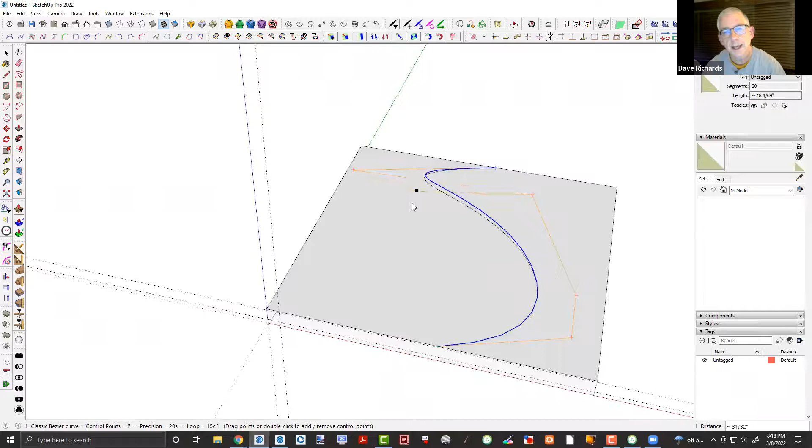The Bezier curve tool, you start by identifying the ends, and then you can draw curves. I'll come over here, double click to set the last point, but now I can choose to edit these, and I can even add more points if I want, and modify that curve. So that can be a very handy tool. One thing I should point out here, because it's very obvious, is SketchUp simplifies curves to straight line segments.

And for the most part, that works just fine, and most people won't see those curves anyway. You can, like with this tool, increase the number of segments up to 48. Let's do something here, 48 segments, and smooth that out. So I can add more segments if I need to. You have to be careful, because you can really bloat the geometry in your model if you do that. But sometimes that is a good idea to do.

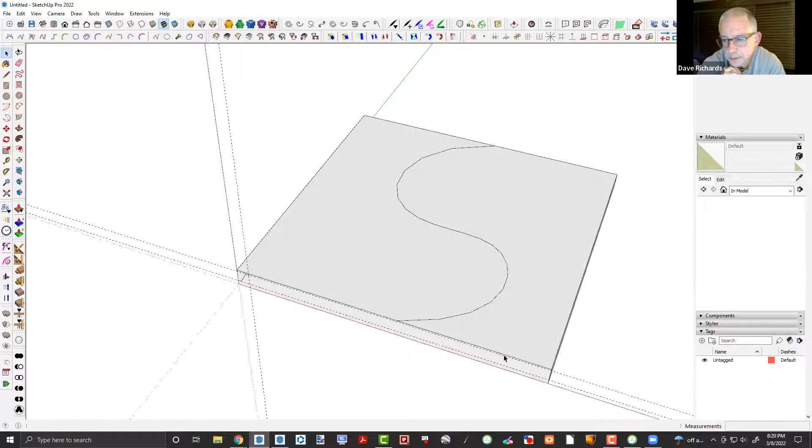Is that a free tool? It recently became a commercial extension. I forget, I think it's like a one-time, maybe $8 or something. The author just at the beginning of this month converted it to a for-pay extension. He's got about 8 or 10 extensions, and if you buy the whole bundle, it's $40. They're all pretty useful tools.

So Dave, when you had that profile go all the way around your box there, you just drew the profile, you selected... I all selected the top, mostly because I wanted the edges selected, so I just double clicked on the top face to select those edges. And then you get the Follow Me tool. Oh okay, I see what you did there, click on the profile.

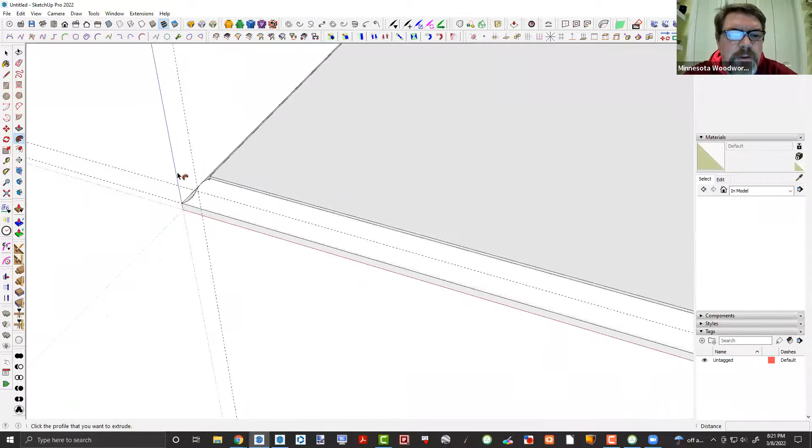The neat thing about Follow Me is if I undo all of that, so I'm going to get rid of... come on, get it. Okay, well I'll just delete those things, whatever. Follow me is... actually, let's put those back, because I can do this. So I'm going to use the rotate copy function.

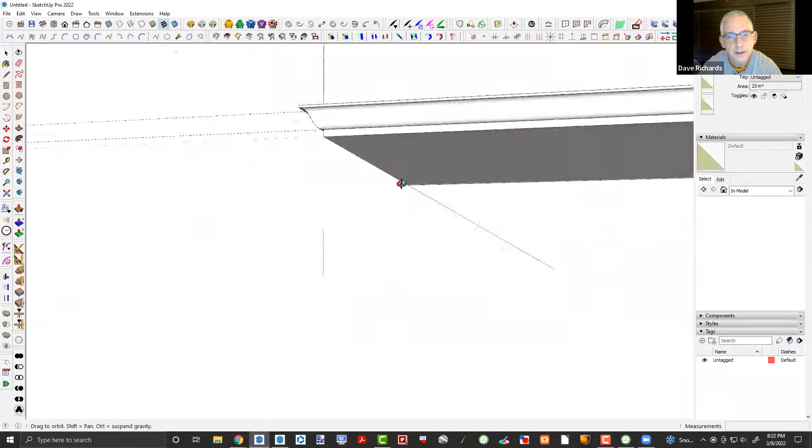So now I've got that like a molding that was going to be applied. Took that out, but no big deal. I will just, normally it doesn't do that because I have that separated, but oh, I see what my problem is. Let's fix that. See if that works better. There's what I wanted to do. So now instead of subtracting, I've added a molding, you know, like that might be a crown molding, right? I've just added that to the model. So it's kind of a slick way to create moldings or profiles.

Again, I think of this as like running a router around the board, or running it on a shaper if I had a shaper.

Are people falling asleep? No, I'm still here. Yeah, I think things are starting to wind down a little bit. Okay, yeah, we've lost a few people. We've lost a few, but we still got 63 people, so we're still doing well. Good, that's good. Well, I didn't want to lose anybody, but hopefully people are getting something, seeing something.

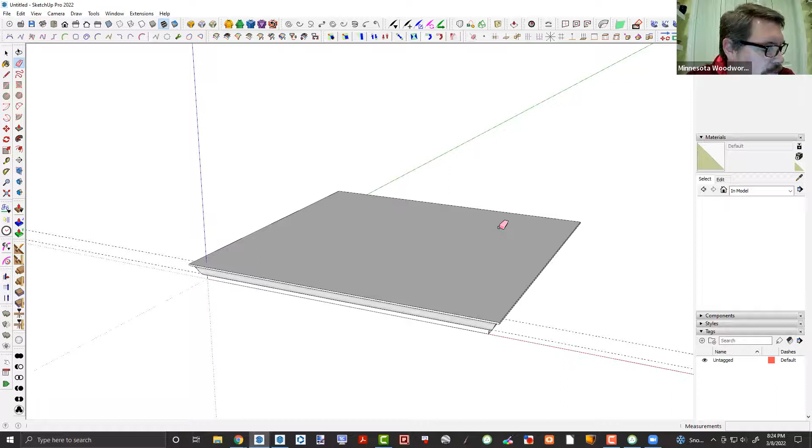Well, I didn't even know they did that, so they're talking about it. I haven't been telling anybody because I didn't know it was public yet. So I went to the link they gave, and it's kind of a place where you could sign up if you're interested. There's really no other information about it. So is there a cost to it? And is it like a one-day program? They have a cost, to be honest I don't know what that is.

They are running it, basically I'm recording some videos that they're going to release. They'll be in fairly short chunks, and the way I understand it, they'll be releasing them on a weekly basis, I think starting in June. Then after they release, there will be a time scheduled for a live Q&A, so people can ask me questions. I'm going to go through the process of creating a model, showing my workflow as I go, talking about things I'm thinking about as I create a model, and hopefully show some good workflow habits. The thing about SketchUp in my mind is that it's an incredible tool, but at the end of the day, no matter what you do in SketchUp, you still don't have a table you can eat dinner at or a chair you can sit on. So you want what you do in SketchUp to be really efficient, and you want it to inform what you do in your shop.

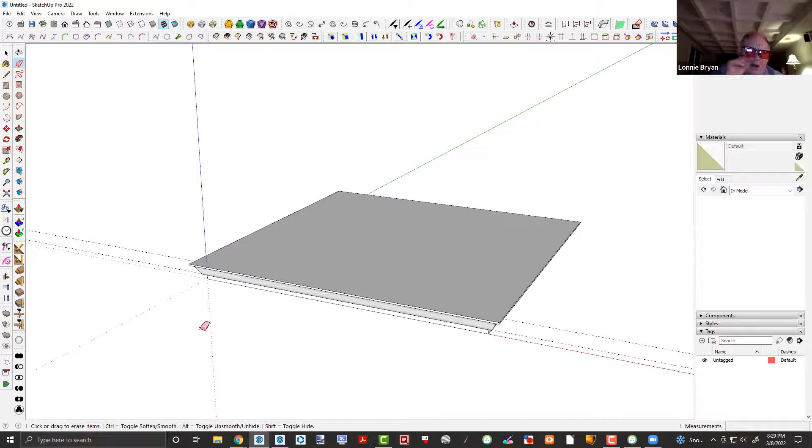So my understanding is there's another product on the market similar to SketchUp, called Fusion 360. How does it compare to SketchUp?

Well, Fusion 360 is more of a web-based product, more designed for machinist type CAD stuff. I tried using it, some people like it and that's great, but I found it really clumsy. I do SketchUp when I'm driving, I look at things on the road and think, okay, I'll draw that this way, use push pull, use this tool, and do that. That's how I model this stuff.

I've been doing SketchUp so long that I think I'm broken for learning other software, but I find Fusion 360 to be really clumsy and not very intuitive at all. But that's just me, some people like it. Again, it's web-based.

It's really deep, there's some interesting things about Fusion 360, like it's parametric, meaning when I was modifying this workbench, in a parametric program I could have set it up so that if I moved the legs, the top would have gotten longer with it.

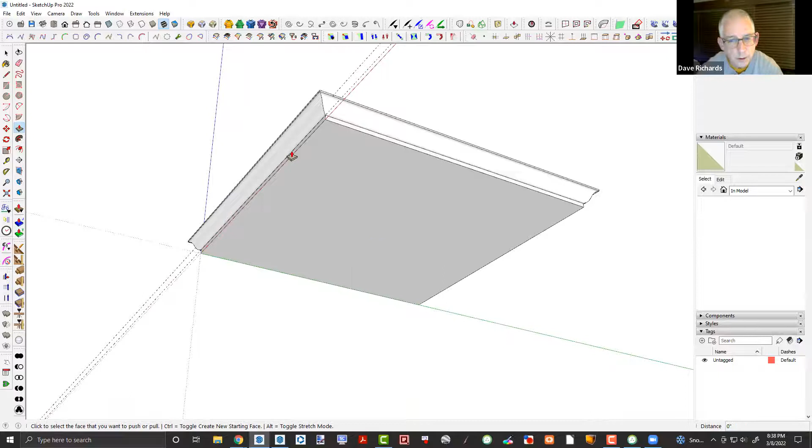I've seen this more with architectural things—it's a little hard to make these things happen without some forced setup. I'm going to make it so the back face is obviously not parallel to the front. Now if I do the same thing and try to push through, it doesn't punch the hole because that back face isn't parallel.

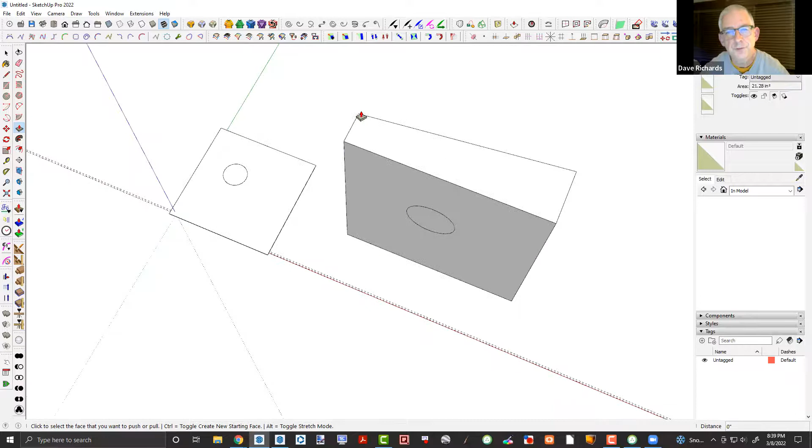There are cases where you can create geometry where that doesn't work very well. If this was the shape and you wanted the hole to go through, the way you fix that is push it all the way or push it past. Select those two surfaces, right-click to bring up the context menu, and do intersect faces with selection. Now I can delete that and that and that, and I have a hole. So there are ways to deal with more complex geometry if you want or need to.

If the faces are parallel, it should be pretty straightforward.

Hopefully that... well, you just got invited to a cabin near Ellendale, Minnesota, for walleye and pan fish fry and talking woodworking and SketchUp. Wow, that was Patrick Ahern. I'll be getting in my car right after we get done here. That's really nice, Patrick. And of course I'm hungry.

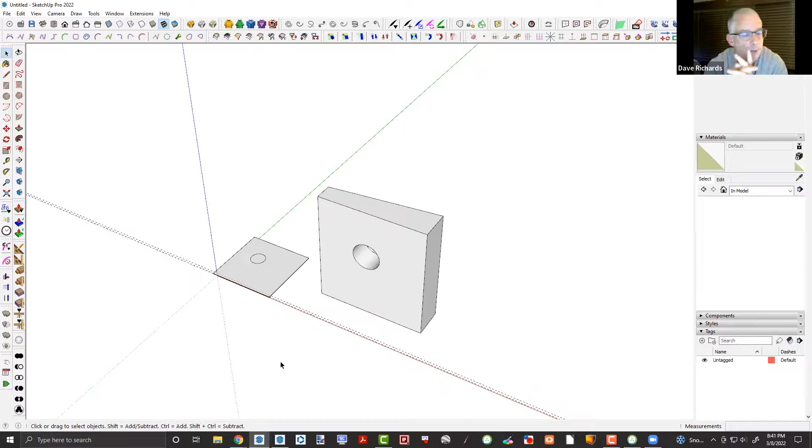In fact, I've got students in England and Australia and Hawaii and California and, well, pretty much all over the United States that I work with on a pretty regular basis. So if Patrick wants to get together and do SketchUp stuff, we can do that. Things are a little busy right now, but we can work things out, especially for walleye.

He can just contact you through your email? Yeah, so I'll put that back up there in case. I'm always open to answering emails. I might not get back to you right away because things are kind of busy, but I'm supposed to be a retired guy. I'm almost wishing I could go back to my old day job, because it'd be a lot less work. But I really like this. If people want to email me with questions or whatever, I'm happy to try to answer. If they've been using SketchUp and they're trying to do something and they can't make it work, send me the SketchUp file too, so I can see what it is. I can usually figure out either what's going on or a different way to make it work.